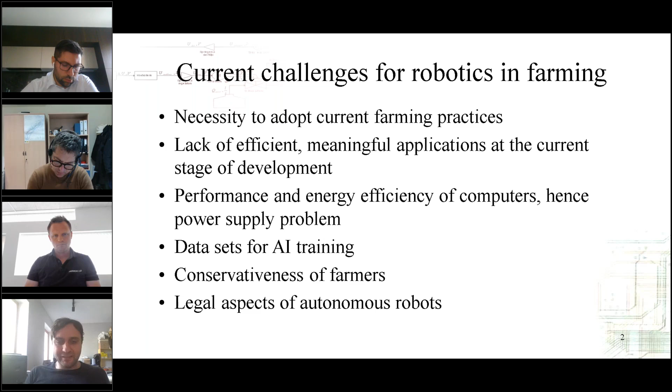In our research, we focused on laser use for treatment of weeds, and there's a lot of benefits when introducing a laser for weed control. These are well studied in various scientific research and pilot projects. Laser is a fast and precise instrument. We know it from industry, where laser is used for welding, cutting, and other works, from medicine and so on.

This way, laser could be a very good approach and practically the only alternative for hand work when working on weeds, inter-row and inter-crop. And of course, when using a laser, if it is done efficiently enough, we can reduce chemicals for weed control.

And also we do not disturb soil and weed seeds as it would be with mechanical weeding. There is also a lot of conditions for efficient laser use. One is safety, configuration of rows, and also there's a lot of requirements regarding platform or tractor moving precision, height adjustments, and so on.

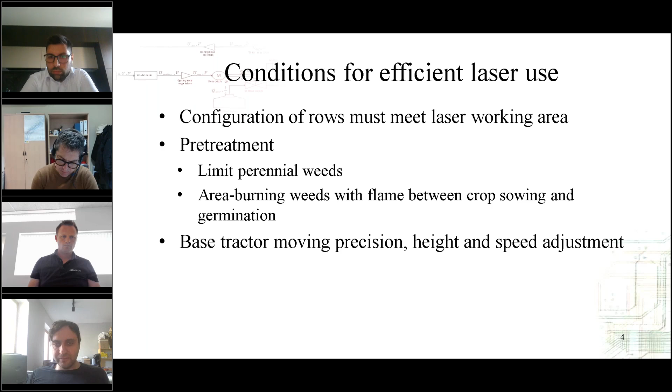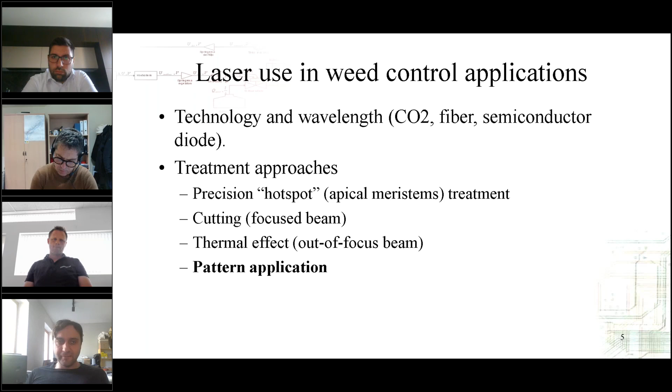When considering laser for use in weed applications, we need to think about how we will apply the laser energy to weeds. One thing is selecting the right type of laser, and another thing is how we apply this limited laser energy to plants. When we are talking about a plant, a green leaf will absorb certain wavelengths of the electromagnetic spectrum.

If we are working on a blue light spectrum, it obviously will work better than on green light because leaves are green, they are reflecting green light, but blue light, red light is absorbed, and obviously it is better to work with such kind of lasers. If we see a little bit farther in the electromagnetic spectrum...

...then we can not only work with chemicals in leaves like chlorophyll, but also with water, and I mean by evaporating water. For this purpose, one of the best solutions is CO2 laser, which is a very mature technology. It works at about 10 micrometers wavelength and allows us to evaporate water.

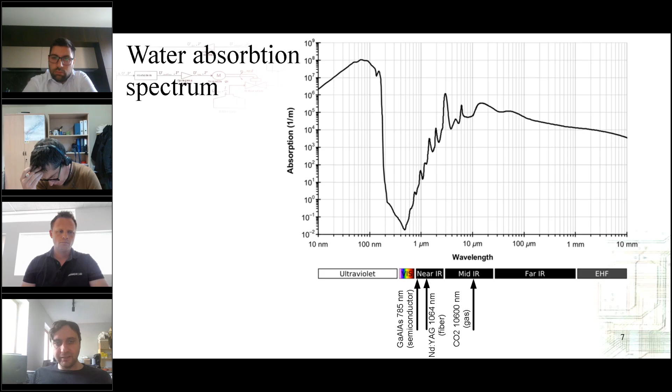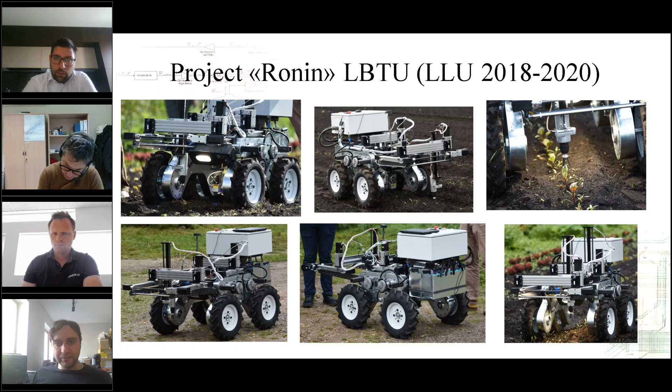During our developments, we worked on a robotic platform which could bring a laser and some mechanical weeding tool onto the field and make field tests. This platform is actually based on a mobile robot developed in our university and consists of off-the-shelf CNC mechanisms which can position effector tools, laser, and mechanical mill. And the software part of this solution consists of a lot of subsystems.

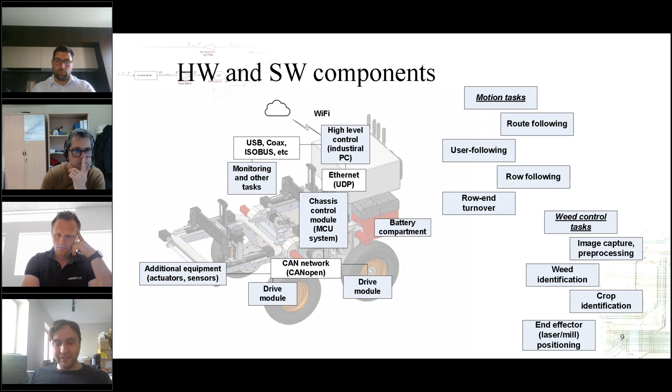We can see them here, and we can see that from one point of view, this is a very simple device, just a moving platform with two common CNCs, 3 axes. But from the other hand, it is a very complex software solution. So here we can see more detail on the hardware part.

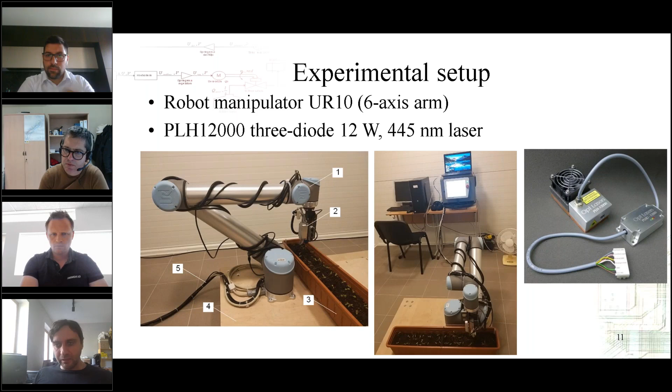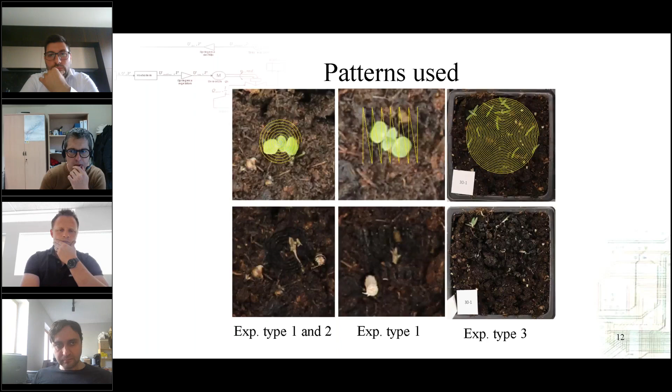Before going to the field, we made some experiments in the laboratory. We used a robotic manipulator and laser, you can see here on the right-hand side. We tested different approaches for treatment, beginning from different use of patterns and use of treatment repetitions. For example, here we can see experiments with 2 treatments.

The top row shows the control group where plants were developing normally, and we have a constant increase in the so-called green mass, or the green pixels from the picture. And the bottom row shows 2 treatments. Here we can clearly see that plants are stopping the development, and the total green mass area is greatly reduced.

By this experiment, we concluded that laser can be used not only to completely eliminate weeds, which takes time and takes a lot of energy, but we can try to reduce the total biomass of weeds so crops could take over, and we can use laser more efficiently and, for example, increase the speed of treatment.

The next stage was, after the project we made a startup, we continued the development of laser treatment equipment. And here we moved to a little bit different way, taking into consideration the conservativeness of farmers I mentioned at the beginning of the presentation.

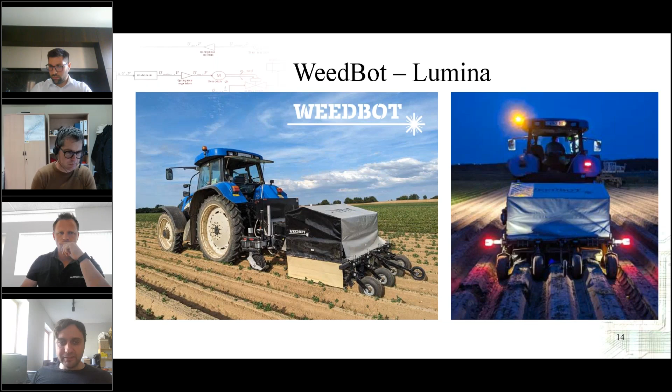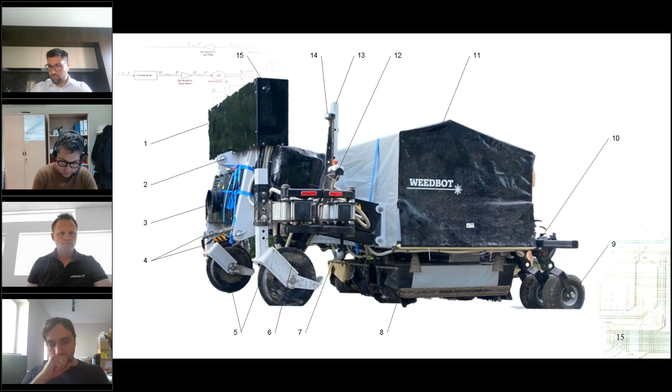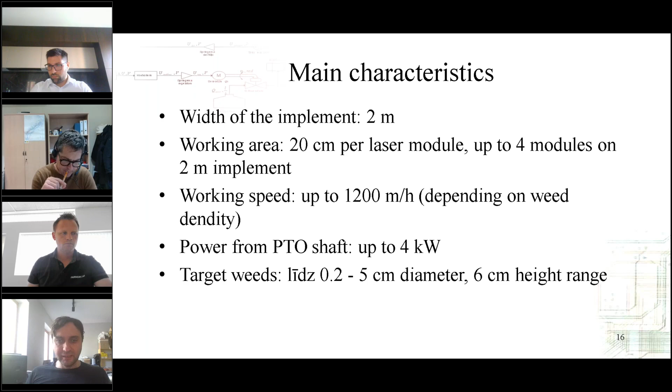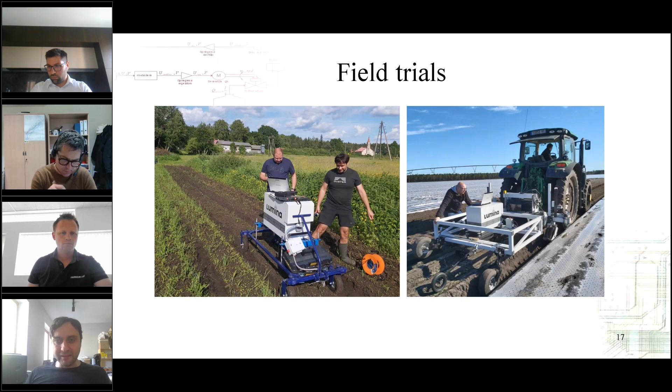We had different field trials with simple laser units on a trolley, and then a unit on a frame, and went to the final solution with the tractor implement. We started from lab tests.

Here I compiled a video of a lab test with carrots and some weeds. Frames with laser light were removed so something could be seen, because when we are working with a blue light laser, everything is overexposed and it's hard to see anything.

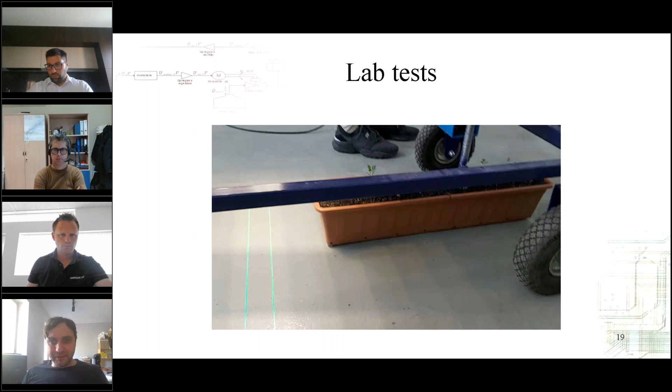And next, a lab test with the trolley. Here you can see all the frames, also with the blue light.

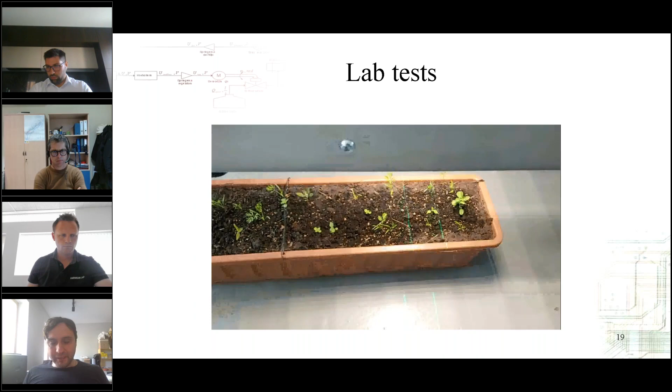The working speed is quite high, but as already mentioned, the plants are not completely burned down. We are trying to work only with the surface of the plant to reduce its further development and reduce total green mass.

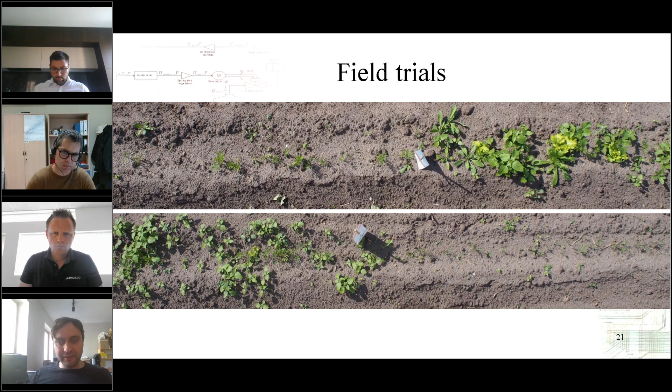And the effect can be seen here in field trials. We can see that plants are mainly not completely eliminated, but their development is greatly reduced.

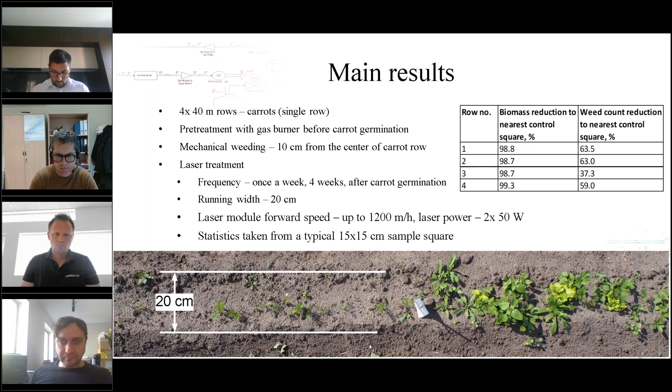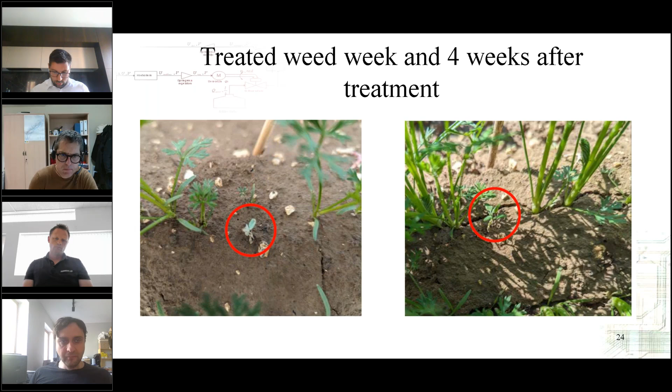There's a summary of the results with some statistics. Here are some examples of fully treated weeds when working at lower speeds, and some development of treated weed after a week and 4 weeks after treatment, and some partially treated weeds, especially those which are out of our treatment range, large or multi-year weeds.

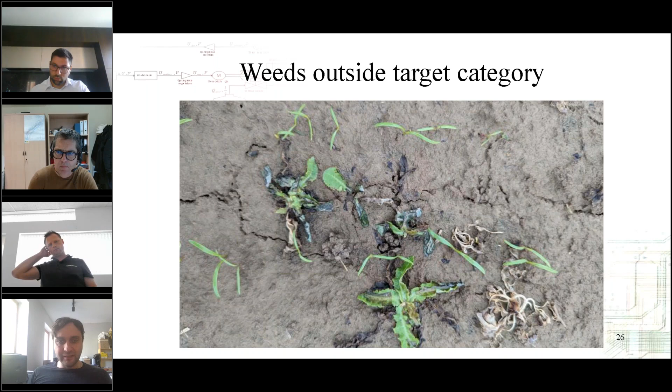Our main conclusion is that theoretically and practically, blue laser is capable of significantly reducing weed development in real conditions. It's possible to perform weed control by stopping weed growth and completely destroying its canopy. It's also more feasible to identify crop among weeds and treat the green canopies than trying to make data sets for all possible weed species we face in the field.

This is regarding the data sets I mentioned at the beginning of the presentation. Also, when practically working with a mobile robot, localization using GNSS technology like GPS in real conditions close to farms is possible, but problems may arise due to close obstacles, for example buildings, lighting masts, and so on.

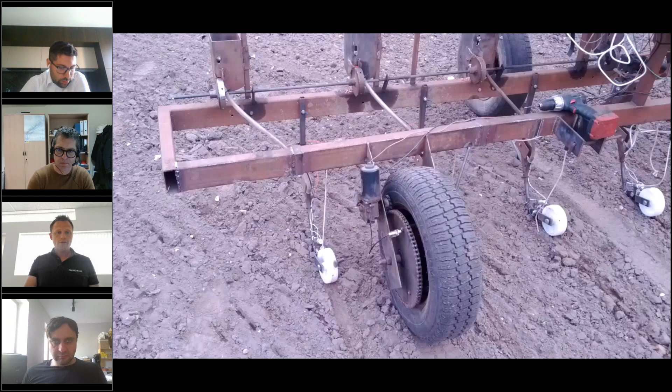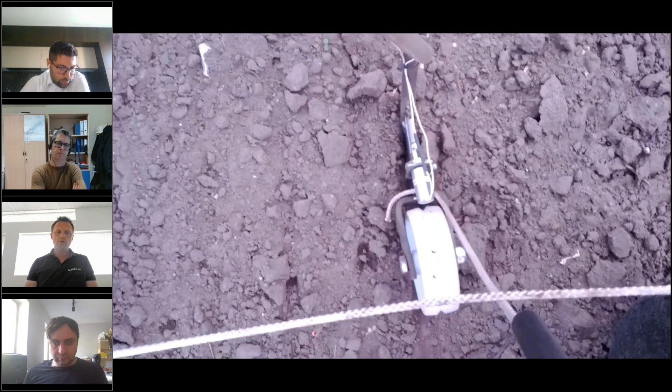First of all, we started many years ago with the development, and I just have a small video here where you can see where we started. The idea was that we needed to seed a seed really on a specific spot, because we are only using GPS technology. We don't use any camera at all. So the idea was to start by developing a seeding system that could do really precise seeding with a high accuracy, and after that we could start doing the weeding.

So just to get some numbers on, in 2018, FarmDroid as a company was established, and just jump to 2020, where we started to sell the commercial robots, not only in Denmark, where we are from, but also in Sweden, Germany, the Netherlands, Switzerland and Austria. It went quite fast in the beginning, so I just jump 2 years more, and then we have expanded our sales to more or less the rest of Europe, France, Spain, but also UK, Norway, and also Canada.

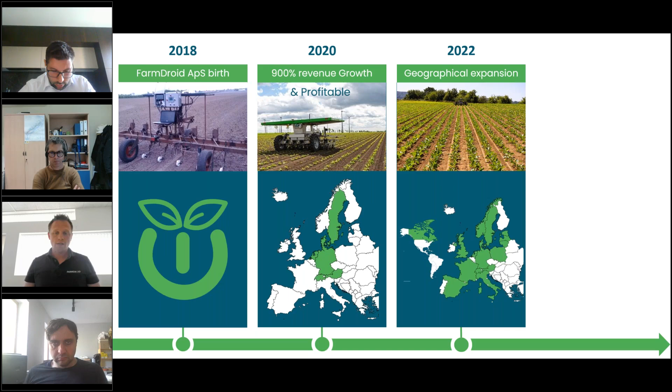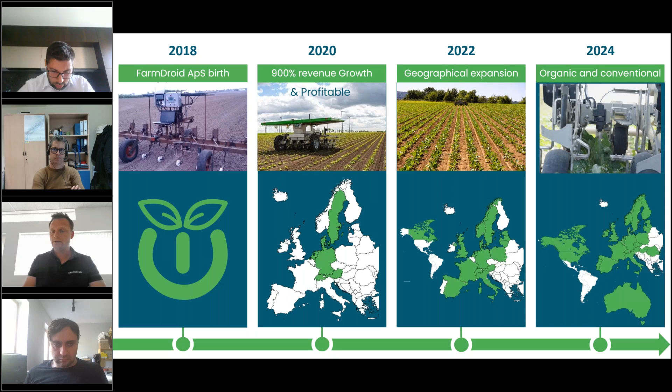And a little bit the same if I jump 2 more years. We now are in both Australia and the US, and the Baltics and some of Eastern Europe. So we are now covering a big part of Europe and also a lot of other countries. But what do we do?

For farmers in general, the social challenge is we do need to have some kind of food security if we are thinking for the future as well. So maybe farming robots could help out on that. The demographics in general are that the farmers are getting older and older, and we have fewer farmers compared to the year before. So in that case, we can maybe implement some farming robots into the farming, and by that achieve the same production capacity.

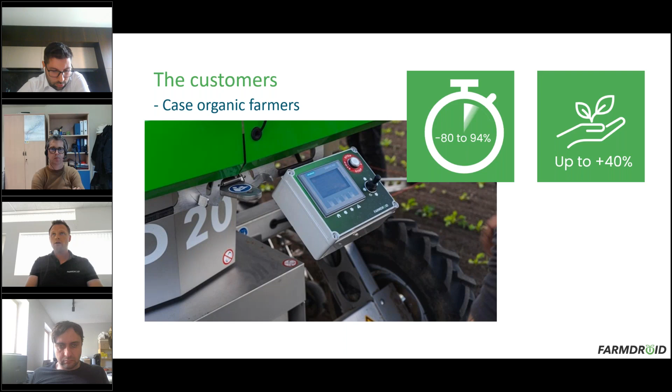And from the customer's point of view, I just took some numbers here. It's a case from some organic farmers where we have tried to put down the numbers. If we have an organic farmer, he probably needs to do some kind of hand weeding to prevent the weeds from taking over. So if he invests in a farming robot, he will save a lot of time on the hand weeding. It's also shown in the numbers that they are gaining in yield because they are getting sufficient weed control. And we have some farmers who have up to 40% increase in their yield.

The next part is the labor, because if you have a farming robot or FarmDroid to do your weed control, you can save a lot in labor, and these days it can be quite hard to get people to do hand weeding, not because nobody wants the job, but there simply aren't any people to get. It's really a big job to do this. So you do save a lot of labor.

And then in the end, all these people who should do the hand weeding also need to earn some money on it. But if you skip these people, you have some money to make the investment in the farming robot. So in some cases, we actually see a return on investment in more or less a year.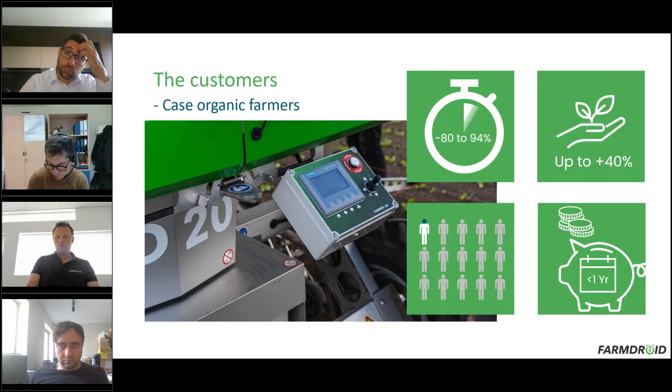But how is the FarmDroid today? The FarmDroid is an autonomous robot with ultra high precision. As I mentioned before, it's equipped with solar panels and a battery pack, which is charging up during the day, and then during the night it takes the power from the battery.

It's a lightweight machine, its weight is around 900 kilograms, and it's a slow going machine. The maximum speed is 950 meters per hour, which also means that it's allowed to run autonomously in the fields. And then it can be set in different configurations depending on what kind of row distance you need, and depending on what kind of crop you are growing with the machine.

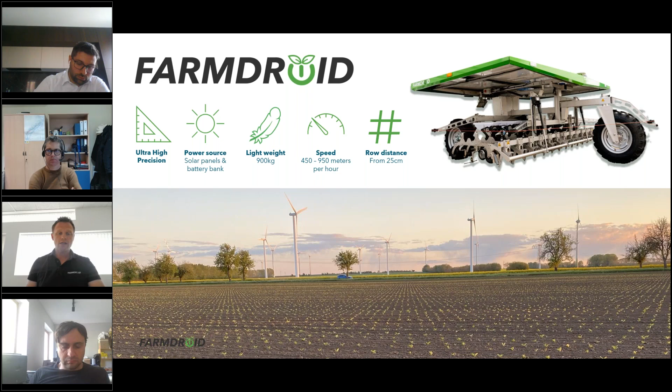As you see on the picture below, all the plants are seeded at the exact GPS spot where we want it to be, which means that you can actually see the row lines no matter what angle you're looking at. With the droid there's also an app, and that's where the user can monitor what the droid is doing right now, and if there should be any errors or information the farmer or the user will need, they will get a notification, and then they can go out and check it.

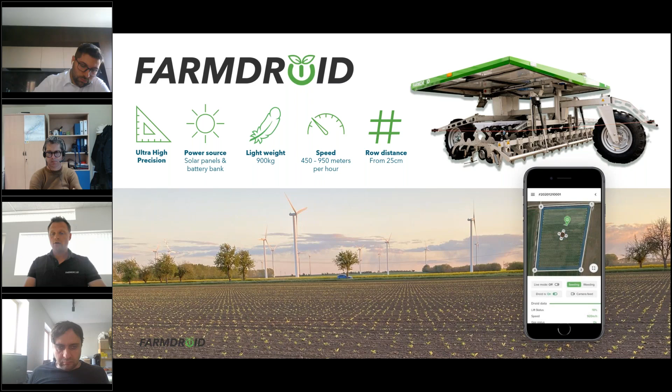And how do we do it? We are using an RTK signal. We are using our own closed GPS system, which gives us an accuracy down to 8 millimeters. And we do that by installing a base station at the farm or somewhere where we can place an antenna. What we need is just clear view to the sky, and then we can cover 10 kilometers in radius from that point.

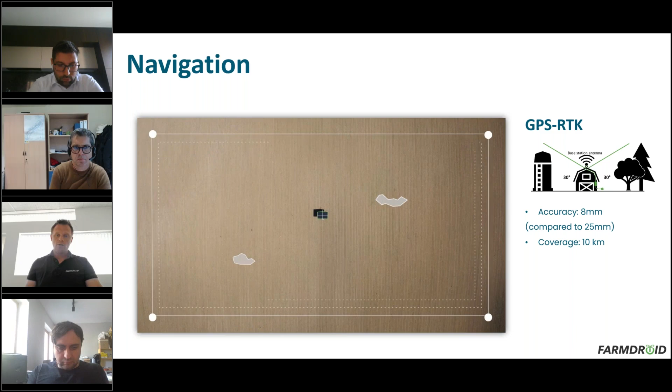And as you see on the little drawing here, we are actually doing a boundary around the field, which is a geofence, and make sure that the robot can't drive out of that geofence. If there are any obstacles inside the field, we also mark them out. And when all this is done, the droid will create a pattern and already have a plan where to seed each seed when it's seeding.

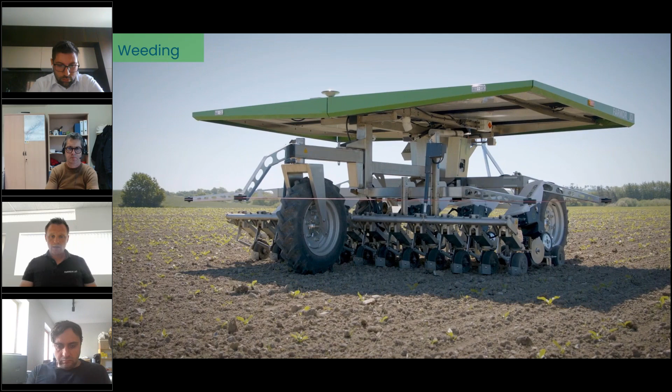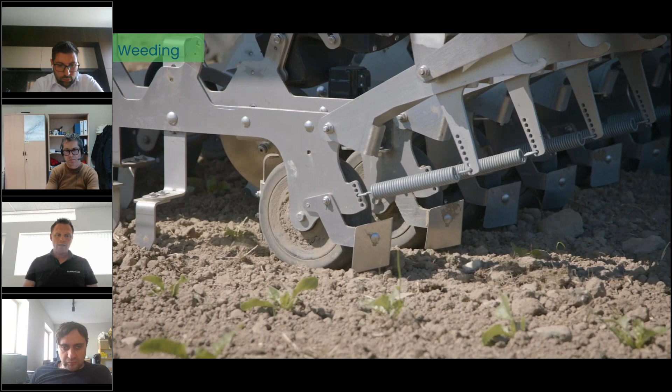I'll just show you a small video here of the weeding part. We have limited time, so I'll skip the seeding and go directly to the weeding. I'll just start it up and I can speak a little meanwhile. As you see, the droid is weeding both inter row but also intra row in between the plants. And it's all doing this by GPS. There is no camera attached on the machine, so it knows from when it seeded the crop where it had placed every seed, and by that it weeds inside and outside the row.

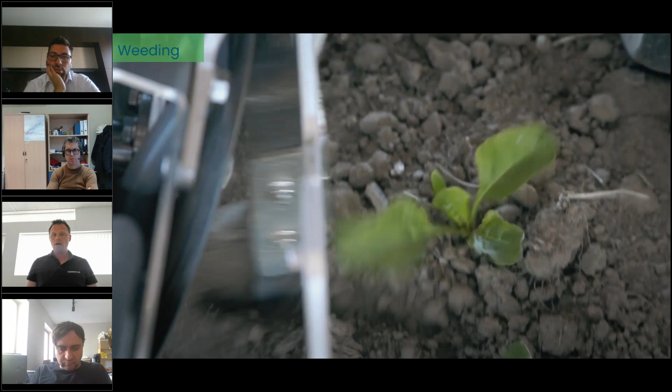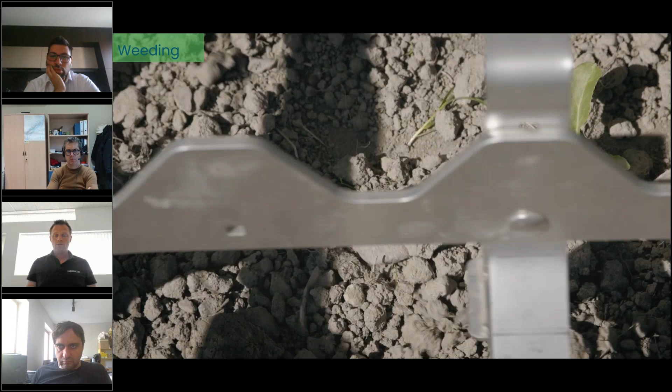We are working real shallow, so when we're doing the hoeing, we're only driving in 1 to 2 centimeters of depth to make sure that we only are touching the smaller weeds. We aim to fight the small weeds because it's easier and also more efficient. And then the machine is going to drive in the field more or less 1 time per week. That is our target. There was a question before how much it can cover, and we normally say that a FarmDroid is taking care of between 20 to 30 hectares. That is the capacity.

And normally we also say to our customers, if we can seed it, we can weed it, because we actually have different seeding methods. One is singling, which could be, for instance, beets. We can also do portions. We do that a lot with onions, so group seeding, or we can do line seeding. That could be, for instance, oilseed rape or herbs. If we look at some numbers from '22, 50% of our machines were doing sugar beets, 20% onion, and 30% mixed crops.

And what crops do we do? I have here some examples: sugar beet, parsley, red beet, onion, turnips, rapeseed, coriander, or kale. But the list is really long. I think we have more than 50 different crops we are doing right now.

And every time a farmer has a request for a seed that we haven't done before, or just wants to get the correct seeding discs, they can send in a seed sample to our seed lab. We normally do this during the winter, and then we test the seed and find out the exact seeding disc he needs for his crop, and then we can ship the seeding discs out, and they will be ready for the spring.

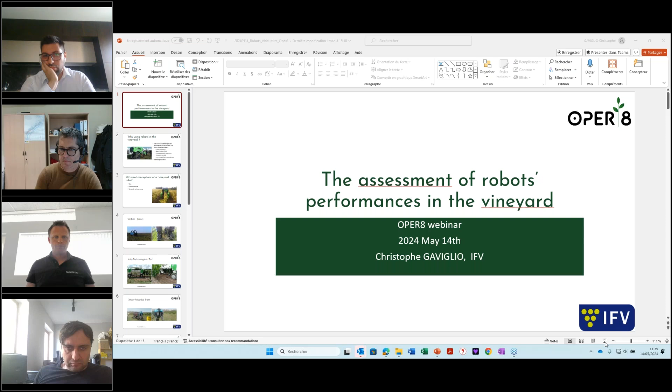Yes, thank you, Camille. Good morning, everyone. I guess you see my screen now. Let me first introduce myself. I'm Christophe Gaviglio. I'm working at the French Institute for Viticulture and Wine, and I'm in charge of mechanization issues and alternatives to herbicides.

So at IFV, we've been working on robotics in the vineyard since 2016. So a lot of time now. And we have had some robots in our fields, and we have had the chance to assess their performance in order to be able to give accurate information to wine growers or to advisors.

During this webinar, I'm going to show you a few different robots. So you can see a panel of robots used in the vineyard. I'm going to explain also why we are so interested in robotics in viticulture. And I'll explain how we assess their performance, and I'll give you some figures about their actual performance.

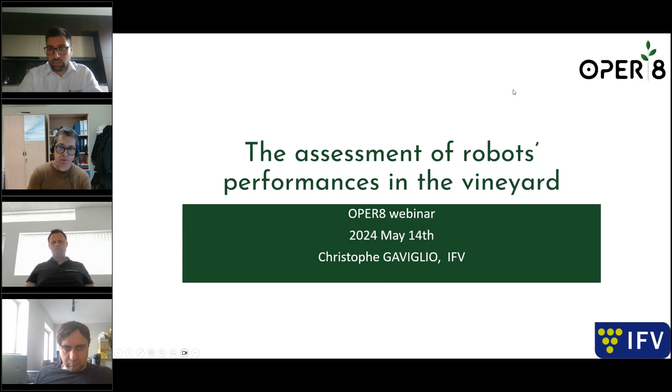Okay, let's start with why we are using robots in the vineyard. More or less, it's the same thing as Rasmus said earlier. The first alternative to herbicides in the vineyard when it comes to weeding under the row between the vines is mechanical weeding. And mechanical weeding as an alternative to herbicide has some disadvantages: a lower efficiency, a short lasting effect, so it requires a lot of time.

It requires a lot of accuracy to be able to do the weeding perfectly between the vines without being harmful to the vines. And we know that today we have a lack of qualified tractor drivers, and this is a problem to do mechanical weeding with tractors. So weeding robots seem to be a very good solution to this main issue of using mechanical weeding as an alternative to herbicides.

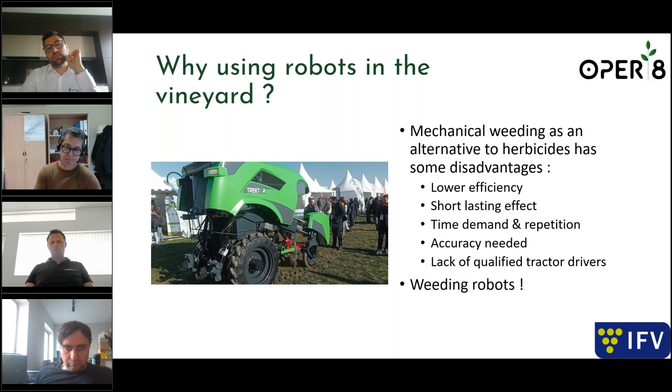So let's start with the different conceptions of vineyard robots. As you will see, there are many different sizes, many different conceptions for a vineyard robot. The difference might come from the power source also, and if the robot is a straddle robot or an inter-row robot. Here you can see a Trektor robot, which is presented as a straddle robot, but which can also be used in the inter-row, thanks to the possibility to vary the width of the machine.

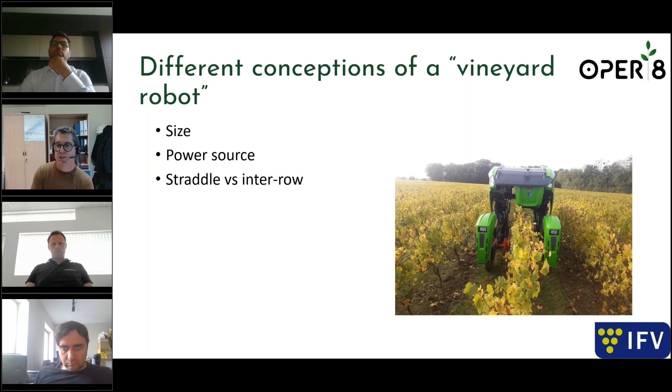Here we have the Vitibot Bakus robot, which is straddle and electric. On the picture on the right, you can observe why it is interesting to have a straddle robot due to the position of the tillage tools that work between the vines. It is more accurate, more precise to work with both tools on the same row, whereas if you are in the inter-row, you have a space on the left and on the right.

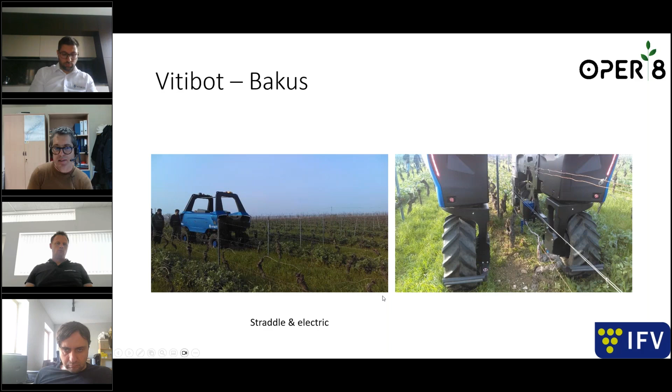Another straddle robot is the TED from Naïo Technologies. Here, as you can see, everything is mechanical when it comes to the tools. So an electric straddle robot with passive tools. So everything depends on the accuracy of the position given by the GPS.

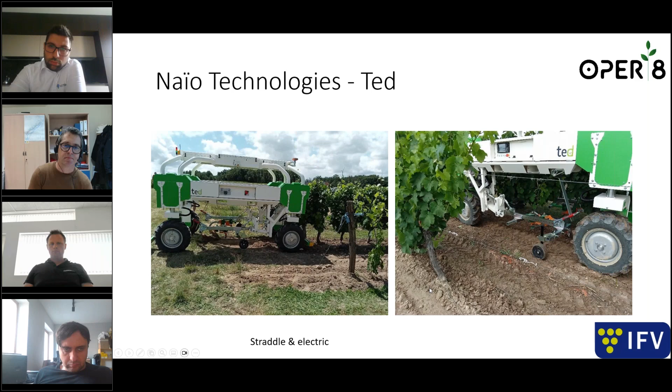This one is a straddle robot too. It is the one from Exxact Robotics. Its name is Traxx, and this one is a thermic machine, with a traditional engine inside, which is considered a good thing by many viticulturists because they find what they already know, whereas an electric robot can be considered new and very innovative, and can sometimes scare new users of robots.

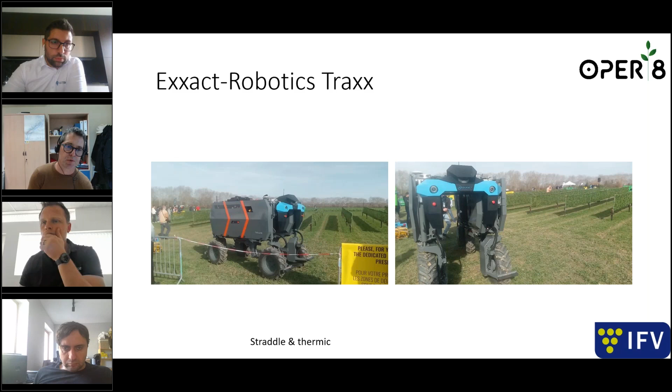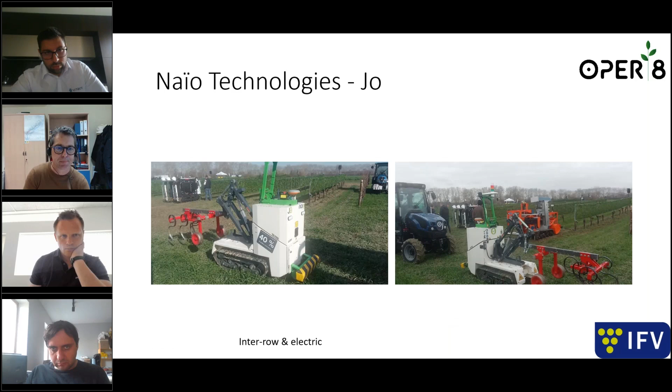So how do we assess the performance of this kind of vineyard robots? We have to tackle a few challenges, like the length of the row, the slope, the kind of soil, and the kind of tools being used, which all have an impact on the performance. The performance can be defined by the surface that can be managed through the year by a robot, the energy being used, and the reliability.

About the surface, we have to take into account the time taken for a U-turn, the length of the row, and the actual speed while working with the tools. We can also add the time of transportation between fields, which is an issue in some vineyards.

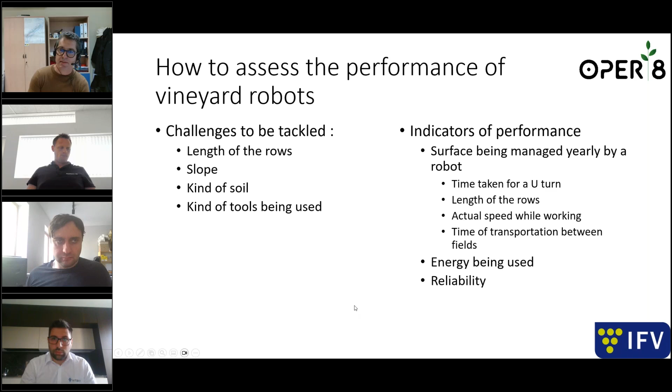So here is the range of results that we have with today's robots, and we know that these results might change a lot in the future years because everything is moving so fast now in the sector of robots in viticulture. Today the actual working speed is around 3 to 4 kilometers per hour, which is not bad. Robots could work much faster, I think, but there are security issues. So maybe the working speed should stay around 4 to 5 kilometers per hour.

The U-turn time goes from 16 seconds to around 1 minute per U-turn, depending on the model, depending on how the U-turn is made, depending on the width of the space between the parcels, and how the U-turn can be defined in the map.

But it's quite good, and this has an impact only with very short rows, because the longer the rows are, the less impact the U-turns have. We also have to take into account the occurrence of unwanted shutdowns, and in all of our trials, this represents only 10% of the total usage time in the field.

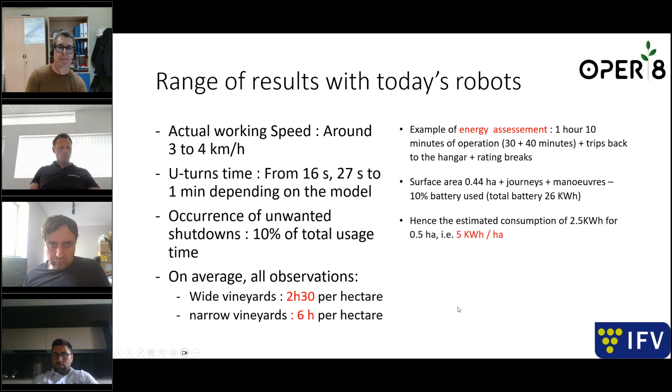Let me finish with some thoughts about the challenges to be targeted for growth of the robotics sector in the vineyard. One challenge to be tackled is the price, because we are okay to say yes, robots are great, they're working quite well, they're efficient, this is time saving for the users, this is energy saving, they are accurate, and most of them are a lightweight solution, which is good when you think of compaction issues, but still they are a little bit expensive for most vine growers, at least in France.

Challenge number 2 is security. Could be challenge number 1, but anyway, security is very important to tackle, because it shouldn't be a limit to the performance, I mean to the speed of the robot. And the more sensors you add, the more security you have on the robots, the more developments you have, the more the price will increase. So we have to find very efficient security solutions without being too expensive.

Hello everybody, I hope you can see the screen. Okay, so first of all I'd like to present myself. I'm Luca Cazzola, I'm a sales manager for the Italian market of Vitibot, the French manufacturer of the robot Bakus.

Before starting, I'd like to give you an idea of the mission of Vitibot. As other speakers already mentioned, Vitibot has the goal to give a concrete and practical answer to the challenges vine growers are facing today. In particular, the environmental challenge: society requires vine growers to produce in a more sustainable way. Think about the regulatory pressure on the usage of chemicals for weeding, which forces vine growers to use solutions such as tractors for mechanical weeding, and so to use much more machines and manpower. So automatization of these tasks is very useful.

Let's think of the societal challenge: there is more and more a lack of manpower, and not only a lack, but even when you find the personnel to work in the vineyard, it's often very challenging to find specialized ones, or people who will stay, because they may switch to another job if it's too hard. So proposing a solution that is a robot gives much more attractiveness, especially to young people, to come and work in the vineyard.

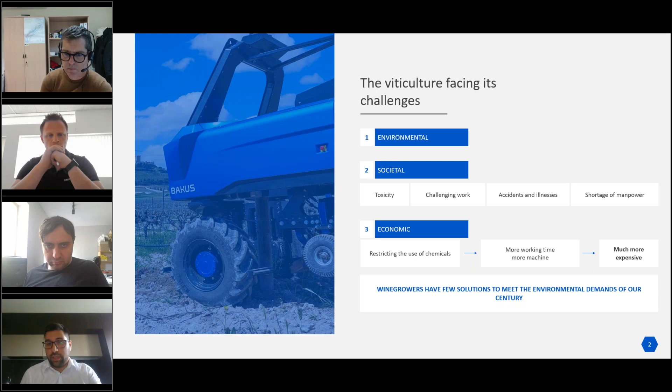And last but not least, the economical challenge: the costs of fuel are skyrocketing, and in particular also the cost of maintenance of traditional machines. So Vitibot brings to the market a solution that is totally and fully electrical, and addresses this challenge too in a practical way.

So before starting to talk about the robot, about Bakus, I'd like to give a very brief presentation of who Vitibot is, to give you some context and background. Vitibot is a French industrial company that started from a university project by an engineer from Champagne, the son of a vine grower in the Champagne region in France.

He started by putting a GPS antenna on an existing inter-row diesel Caterpillar tractor, like the ones used in very narrow vines, like 1 meter or 1 meter 20, as it is in the Champagne area. From this project, Vitibot was founded.

It was founded thanks to investors such as big Champagne companies and wineries, and it kept developing the product until today, where we have the final version, the Bakus, which we commercialize today. So we're not anymore in a prototype stage, it's a fully operational machine, and Vitibot today became part of the Same Deutz-Fahr Group, the same group that owns the harvesting machine brand Gregoire, one of the most specialized groups in manufacturing tractors for specialty crops such as vineyards.

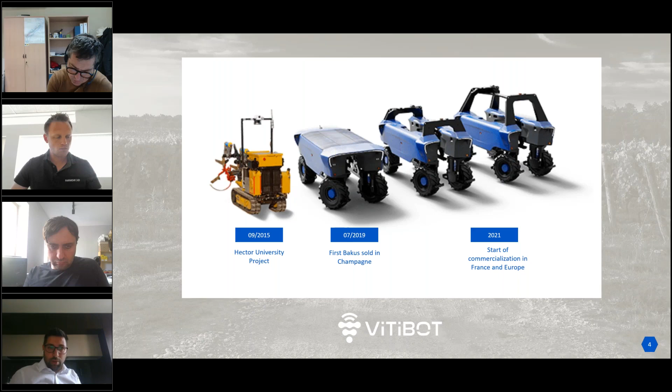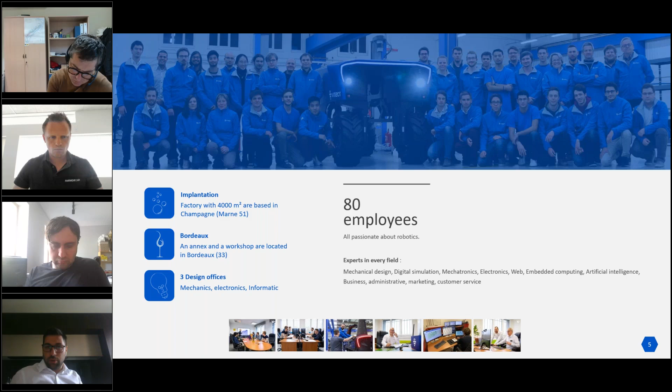So today Vitibot is an 80-employee company. The facility is based in Reims in Champagne, and has a branch in Bordeaux. We are present in over 7 countries, mostly France and Italy, and we have a fleet of more than 150 robots operating in vineyards today around the world.

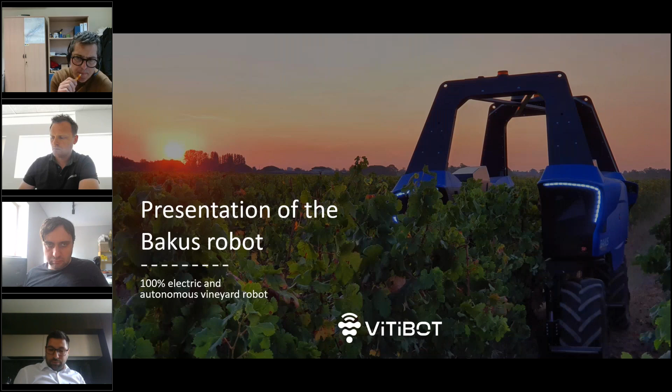Moving to Bakus, today Vitibot produces 2 models of robots, the model S and the model L. Both are electrical, both have the same performance, and the only difference is dimension. The L model can work on a large vineyard with posts up to 2.2 meters and a canopy width of 80 centimeters, while the small version is for narrow vineyards, from 90 centimeters inter-row space, with posts up to 1.75 meters and 60 centimeters of canopy width.

I'd like to show you a video before explaining in more detail how the machine works. Here you can see the 2 models in the video, the large and the small one.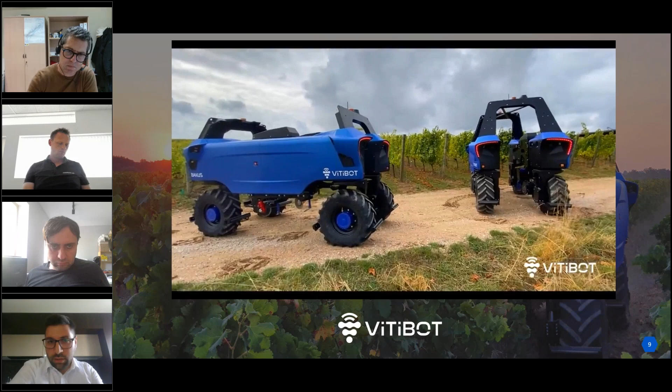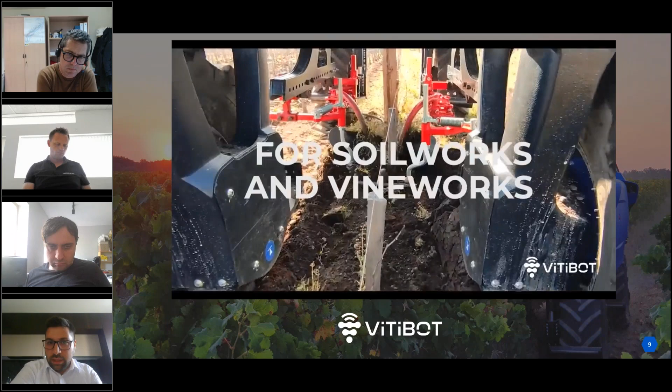Performing in this case mechanical weeding with several tools. We will see in the detail later what type of tools you can mount on these machines.

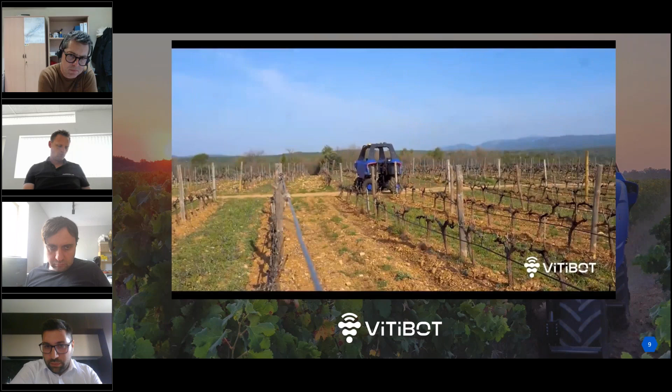The guidance, the GPS navigation, so the autonomous driving, is done totally through GPS with RTK connection. The vineyards have to be mapped before. Once the mapping is done, the machine can operate, do the U-turns like you're seeing here, everything totally in an automatic way. The machines need just this mapping at the beginning, and then they can perform the job autonomously.

In terms of performance, the machines are fully electrical, meaning they have 4 motors in the wheels connected to 4 batteries of 75 kilowatt-hour capacity, which allow an autonomy of work that goes from 10 to 12 hours. This is possible thanks to our electrical tools that you will see later. The machines can go up to 45% slope, 20% lateral slope, and need only 4 meters thanks to the possibility to turn on themselves in the U-turn space.

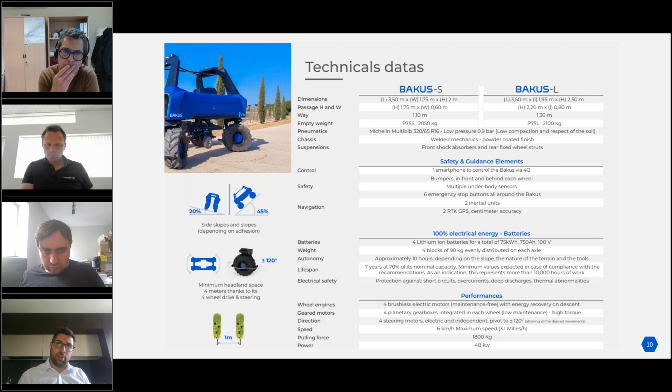So what can Bakus do? Bakus is a machine that is born for mechanical weeding. So the main job is, of course, to kill the weeds between the vines, and it can do it with several types of tools. The particularity of VitiBot is that we have electrical tools such as the electrical intervine or the electrical flail mower, and this will allow us to be very performant in terms of energy consumption, because the motor of the electrical tool is very well suited and compatible with the electrical motors of VitiBot.

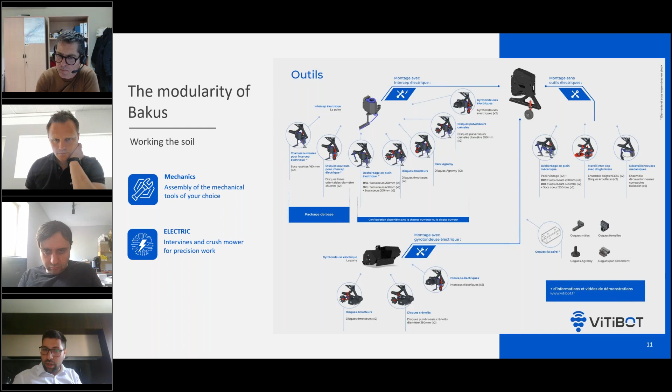This allows me to work many hours, and for a robotic and automatic solution this is very good. But you can also mount all the mechanical tools that the vine growers are already used to, that they already have in their company. This is also a great benefit for them, because they can use something they already have - not the hydraulic one, of course, but the mechanical one. Here you can see an example of a mix of electrical tools, flail mower and electrical intervine, and mechanical tool to perform mechanical weeding in the vineyards.

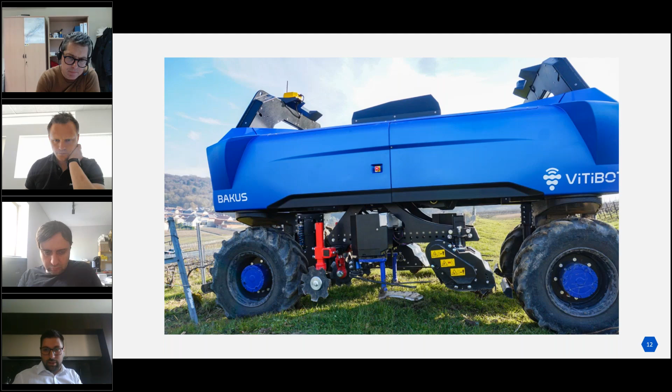Of course, we don't want to give a solution that only does this, but we want a 360 degree solution. So we are developing other tools such as sprayers, trimmer, pre-pruner, sucker remover, leaf stripper. You have several types of tools that will be available soon in the market.

So not only mechanical weeding - and the particularity still is that Bakus mounts only electrical types of tools, not hydraulic, and this will allow me to have very good autonomy in the vineyard maintenance job, unlike other solutions that claim they can mount other tools, but this will eat their autonomy literally. So thanks to electrification, we can have a very good performance.

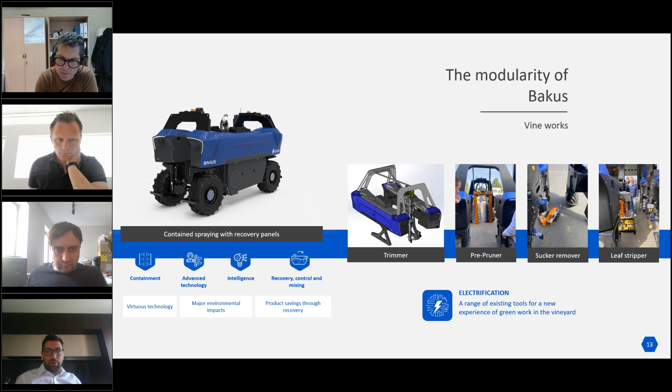So how does the machine work? As I was mentioning before, you need to do a mapping at the beginning. When a customer buys the machine, we do a mapping of all the rows, so the perimeter, the borders of the plots that he wants to work, and all the rows. After that, the machine can work autonomously, meaning you can bring the machine onto the vineyard on the first row.

You will do the settings through a smartphone that is provided with the machine. So you will tell the machine what type of operation you want it to do, give all the settings, and then you launch the autonomous mode, and the machine can work autonomously.

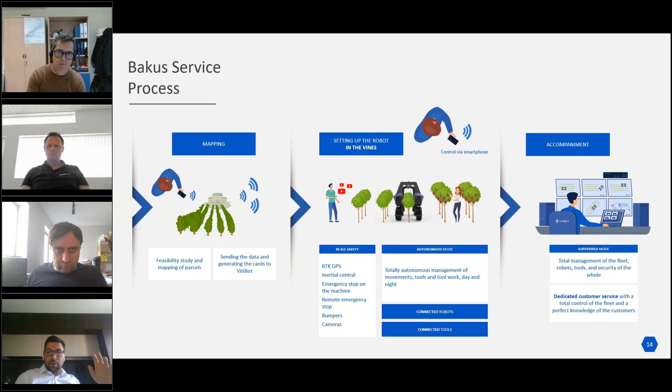Once the machine is working autonomously, all the machines are supervised. I mean, this is not mandatory in terms of remote supervision - the machine can operate even if the supervision is not available. The supervision is basically a team of technicians, based in Reims, and they can see what the machines are doing.

They can see even a 3D model of the machines. They can see the entire fleet that there is in the world. They can see a lot of parameters, and they can even call you if there is some problem. They can see it through live cameras. So it's very convenient for the vine grower, and very reassuring for them. Since it's a new technology, sometimes you might need some support from distance, and this is very useful for them, and very particular to VitiBot.

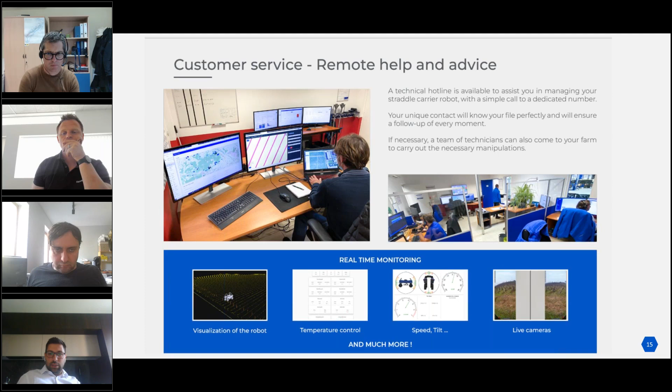This type of remote supervision made by the manufacturer is not going to stay only with the manufacturer. Of course, the manufacturer will be able to do some particular things that the customer won't be able to do from remote, but it will also be available very soon to the vine grower, who can already check many things from his smartphone and computer, but he will be able to see even much more.

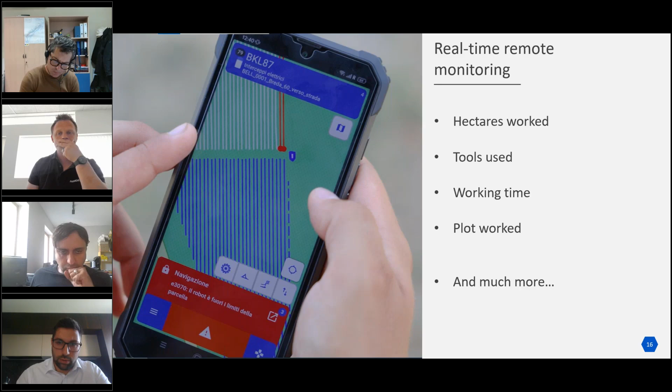When you say electrical tools, do you mean electrical weeding? No, I mean tools that work with electrical energy, like the electrical intervine. It's a machine that basically works like the hydraulic one, just not with a hydraulic motor—it has an electric motor. So the efficiency of the tool is much higher, but it's not electrical in the sense of killing the weed with electricity. We're just giving the energy supply through an electrical motor instead of a hydraulic one.

Thank you. Another question to both Christophe and Luca: how easy is it to adapt these technologies to other types of perennial crops, such as apple, kiwi, berry bushes?

Since Bakus was developed for vineyards, it works very well on vineyards. We have some experience with olive trees, the small ones in particular, in the super intensive system of cultivation, but we don't have any other experience so far.